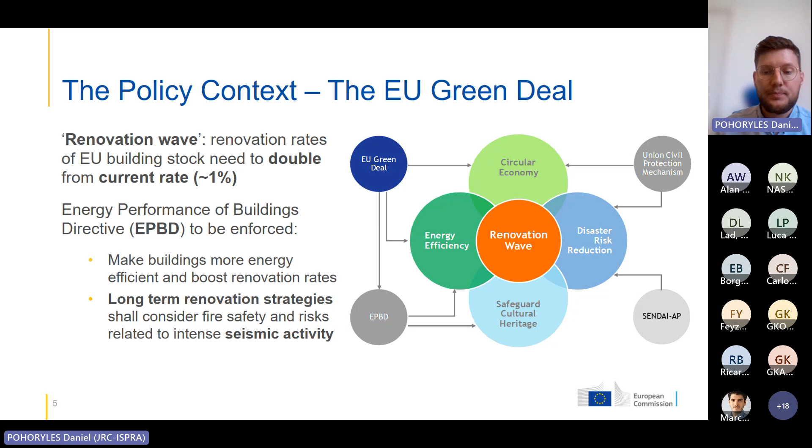At the JRC specifically, there are a few projects that deal with the topic of integrated retrofitting of buildings. A major one was the pilot project on integrated retrofitting, funded by the European Parliament, which looked at integrated retrofitting from a very broad perspective - from technologies that can be used, to methodologies for assessing, to impact assessment. Most of the work we present today actually stems from this project. At the end of our presentations you will also see some recent reports - we've just published a series of reports on this topic at the end of last year, so if you're interested you might find a lot more information there.

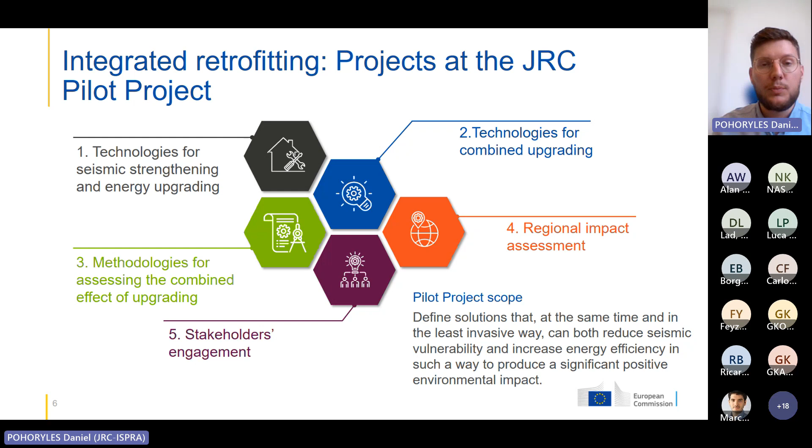Another example of a project at the JRC that I've contributed to is the iRESIST+ project, which deals more with an experimental assessment of specific technologies. I will talk a bit more about this later. This project defines technologies for seismic plus energy retrofitting schemes for existing buildings, and was carried out at the European Laboratory for Structural Assessment, which is our lab here at the JRC in Ispra.

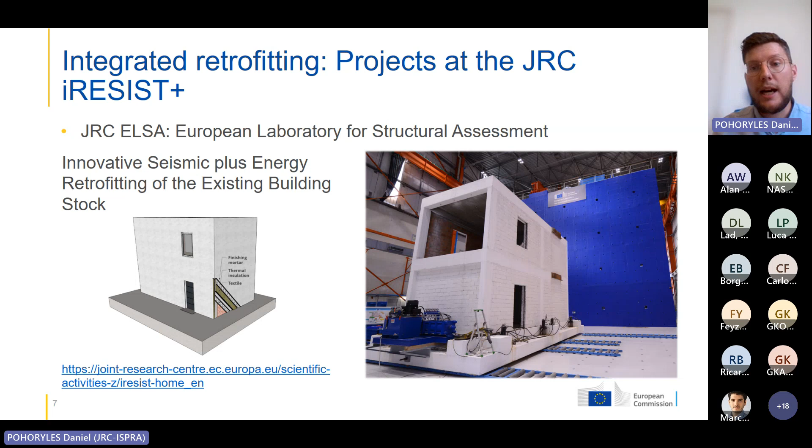So to come now to the why - why do we care about this topic, and why is building renovation such an important topic? As you will all know, in Europe especially, our cities and buildings have quite an old age and are aging as well. Data from Eurostat suggests that 80% of the EU building stock was actually built over 30 years ago, and more than half is more than 50 years old. This means that many of these buildings have been built before modern energy and seismic or structural standards have been put into place.

This explains also why 75% of the EU building stock is considered energy inefficient, which in turn leads to a major share of CO2 emissions and energy consumption in the EU being related to the building sector. Here you can see some figures: 40% of the EU energy consumption is related to buildings. At the same time, particularly in Mediterranean or Southern European regions, which participants of these meetings will be very well aware of, there's a seismic risk, and over 170 million Europeans are actually exposed to earthquake hazards.

And if this is combined with an aging building stock, with degrading materials, or with buildings not built to current standards, there's obviously a very high risk for devastating consequences, as you can see here with failures of buildings or heavy damage to buildings.

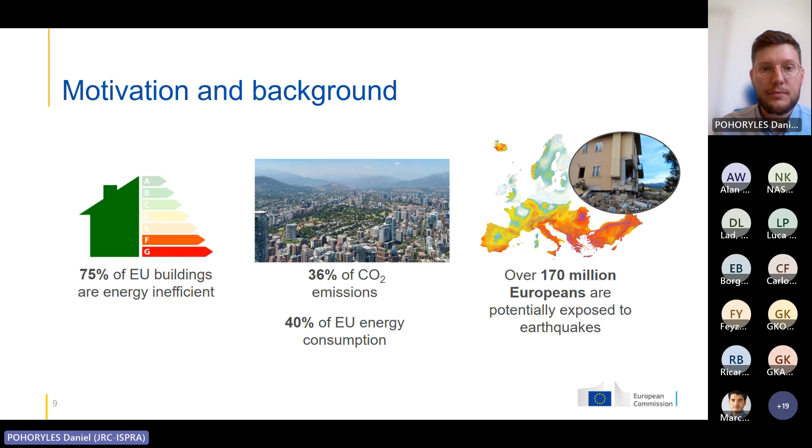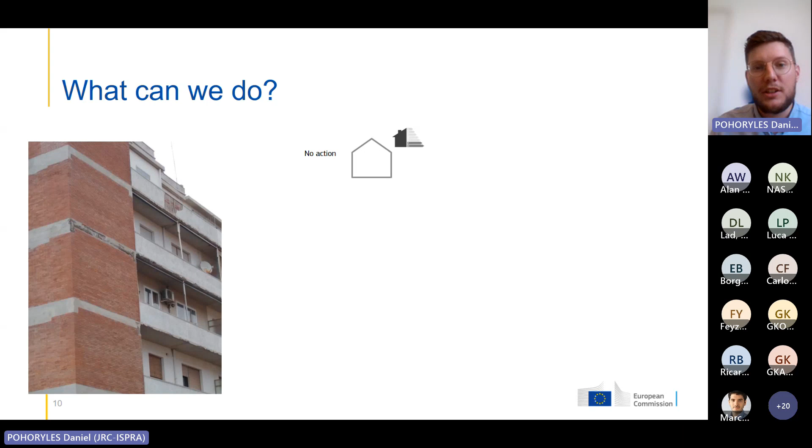So what can we do if we have our building stock that is aging and materials are degrading? We could do nothing, take no action, which may seem the cheapest option at the beginning. But when we consider that the buildings are energy inefficient, combined with high energy costs and the cost to our environment, as well as the risk of earthquakes, if the buildings are structurally deficient there's a risk of damage or collapse. This cannot be an option.

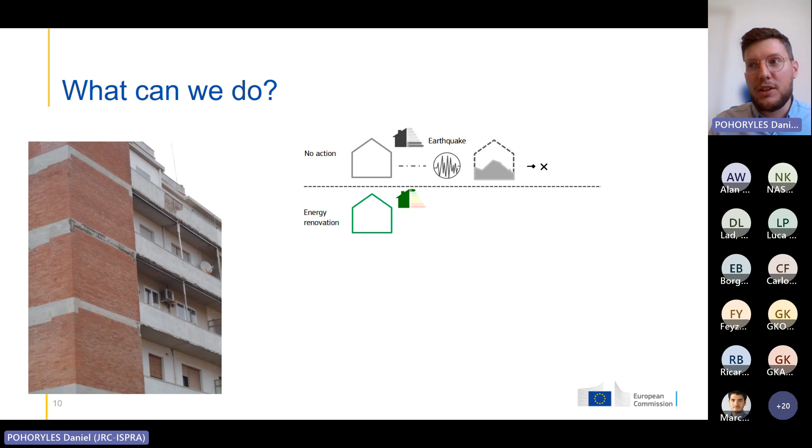Recently, a lot of energy renovations have been carried out across the EU, and this is obviously something very good for the energy efficiency of buildings. But if we're in regions that are earthquake prone, and we don't assess the structural capacity or seismic resistance of these structures, there's the risk that if an earthquake comes and no intervention has been done, the building will still collapse or the damage will still occur. And then we have a building that has a higher value because of the energy renovation investment, so the losses are even higher.

So if we want to improve the structural and energy performance of the building stock, an option would be to demolish the old, insufficiently well-designed building and construct new ones according to modern standards. Buildings would be very highly energy efficient, while ideally also resisting the earthquake loading on the site. This may sound like a good solution, however, think about the scale of the problem.

The large amount of buildings that actually need retrofitting or renovation means this will not be economically viable. It will not be sustainable from a life cycle perspective, and it will change the appearance of our cities so drastically that this just cannot be an option. And finally, if you have cultural heritage buildings, you may not even be able to do this because these buildings are protected. So another solution, the one we're investigating here, is integrated seismic and energy retrofitting.

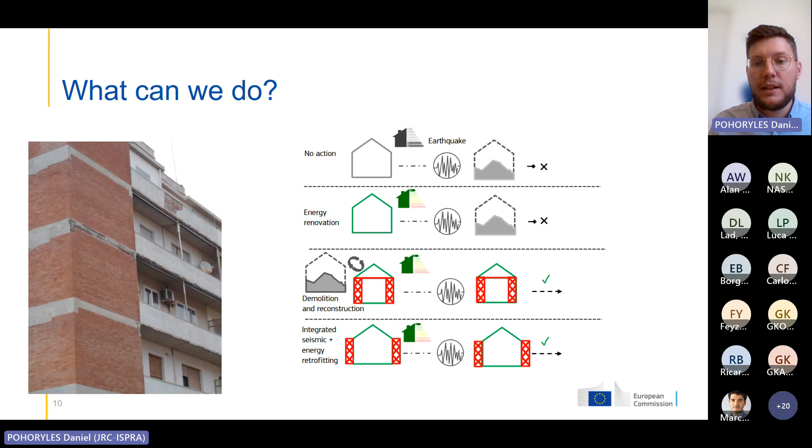By applying energy retrofitting, the energy efficiency can be improved, and at the same time, by also improving the structural resistance through seismic retrofitting, the building can withstand earthquake loads. This allows us to make our building stock sustainable, while at the same time making it more resilient to the risk of natural disasters such as earthquakes.

This brings a lot of advantages: reducing economic and human losses from seismic events, but also reducing the impact of reconstruction or repairs needed after seismic events, which also have environmental impacts. It reduces labor time for renovations, as the two retrofitting schemes can be applied at the same time.

And obviously the energy efficiency part will reduce the need for heating or cooling the buildings if done adequately, while at the same time improving the resilience of our building stock through the structural aspect of the retrofitting scheme. Finally, integrating the two together also provides further cost effectiveness, which might further incentivize people to renovate or retrofit their buildings.

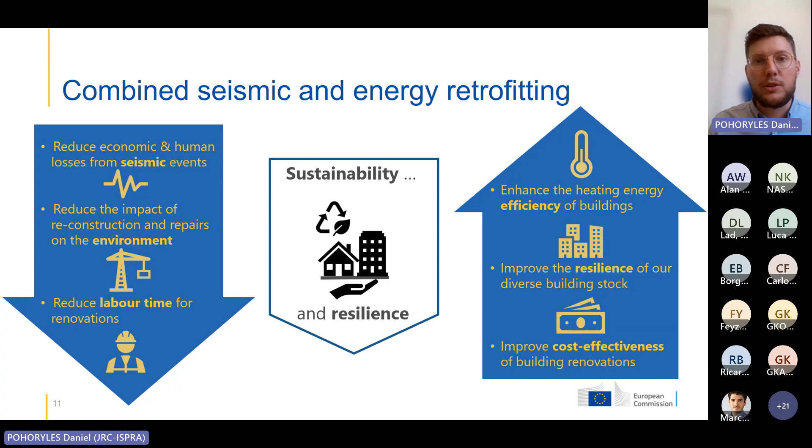So now, having explained what the need is, I will go through some examples from the scientific literature of technologies that have been proposed for combined or integrated retrofitting. This topic has actually emerged in the last maybe 5 years, and it's really an emerging topic in the scientific literature, with a lot of publications coming out especially in the last couple of years.

Within the framework of this pilot project that I described before, we've carried out a literature review on combined and integrated retrofitting techniques, where we identified different types of technologies proposed for integrated retrofitting. We found that the technologies proposed range a lot in terms of the level of maturity. Some works are just pure concepts and proposals, while others have already been validated experimentally or even applied to case study buildings.

When we talk about retrofitting or renovation of buildings, it's always important to consider that any comparisons being made always depend a lot on the building needs. Retrofitting is never a unique solution; there might be many different possible retrofitting solutions for the same buildings, or some solutions that are more adequate for certain kinds of buildings with certain deficiencies or certain materials, or it depends on the status of the building.

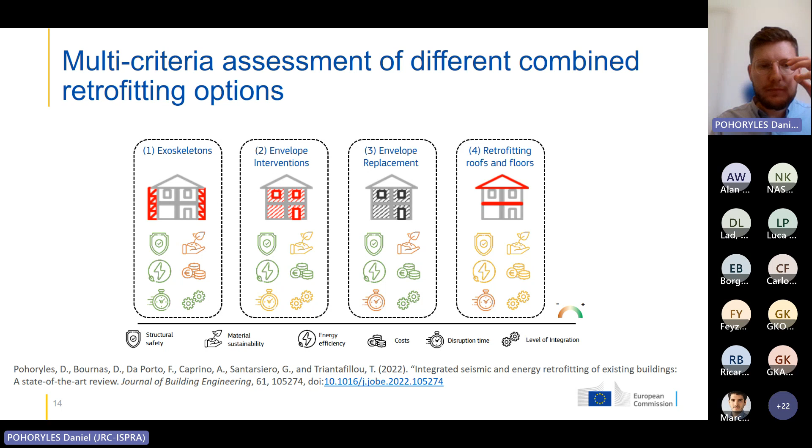To start with, integrated exoskeleton solutions are based on the application of a structural exoskeleton, an external self-supporting system which needs its own foundations that can be connected to an existing building, most likely a vulnerable RC building or a steel building, that currently has low dissipative capacity, and for which the exoskeleton can provide additional strength and stiffness. It's typically not applicable to masonry buildings, however.

Some examples of these include external bracing, RC shear walls, maybe additional RC frames that can be applied, or bracing shell exoskeletons.

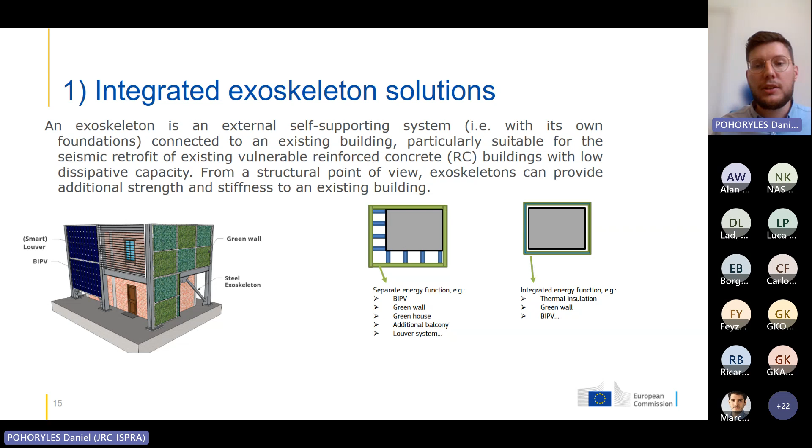Or it can be fully integrated in the sense that if you have a shell exoskeleton, you can also add the thermal insulation or the green wall as part of the shell.

I will give you some non-exhaustive examples of proposals for integrated exoskeletons. One that has been applied already to case study buildings in Japan are integrated facades, a very simple system where on top of buckling restrained braces, a louver system can be mounted. Like this, heating of a building can be reduced from the solar heat gains, and the cooling needs are reduced. This is a very simple system, but is already an early example of integrated exoskeleton solutions.

On the other hand, more advanced solutions would be the two steel-based solutions you can see on the right. Either steel-braced shear wall exoskeletons as proposed by Bellini, onto which all sorts of shading systems, green walls can be mounted, or diagrid exoskeletons, which form a shell around the building and onto which multiple different things can be mounted, providing an architectural upgrade to the building, but can also be considered an energy upgrade by applying photovoltaics or green walls.

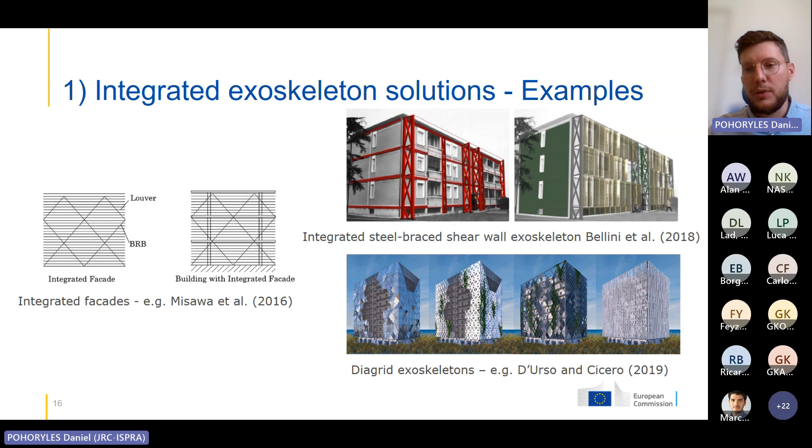The benefits of integrated exoskeleton solutions is that the business downtime can typically be quite low, as residents don't necessarily need to be relocated. As shown before, the exoskeleton can provide an architectural upgrade to the building, but it can also provide more living space, such as the addition of new stories or the addition of terraces or balconies.

A very big advantage is that such solutions are typically reversible, demountable, and repairable, so they're also easy to maintain. However, it comes with some less desirable aspects: these solutions are highly invasive, and they also change the appearance quite a lot of the building, which in some cases can be beneficial, but in other cases, for example heritage buildings, this might not be suitable.

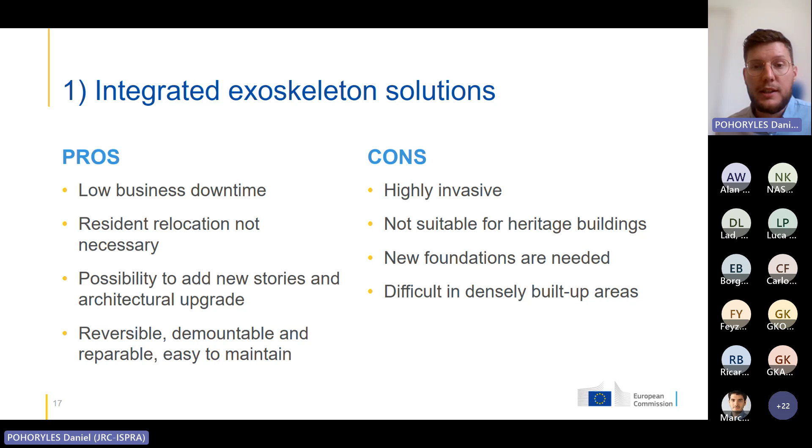On the other hand, the need for new foundations may mean that particularly in densely built areas, such as cities, there might not be the space to actually carry out these kinds of interventions.

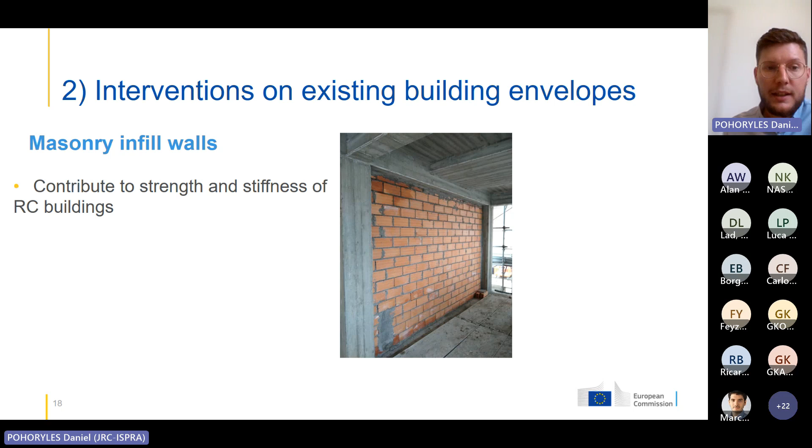A second type of intervention is on the existing building envelope. This is particularly the case for external walls or masonry infill walls in RC buildings or steel buildings, where these existing envelopes contribute to the strength and stiffness of the buildings but are typically not included in the design. So they can also be the source of severe damage, not just to the infills, but also to the load-carrying elements framing them.

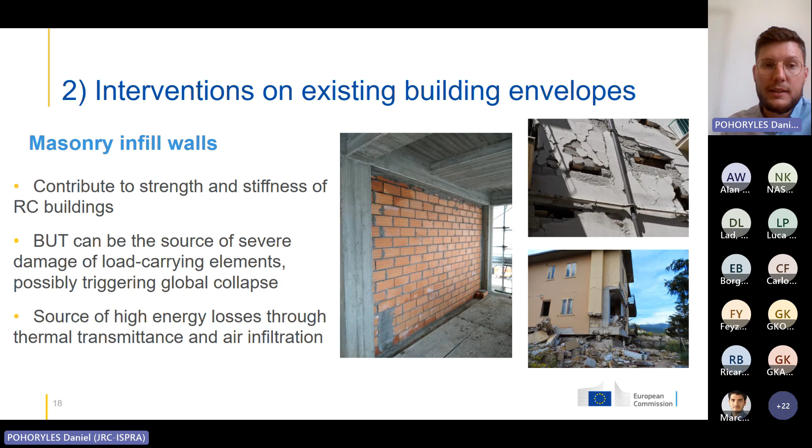Some solutions proposed for strengthening and improving the thermal insulation of external walls include the application of composite materials such as textile reinforced mortars combined with thermal insulation, the use of prefabricated panels, which can be either CLT panels or timber-based panels, or precast mortar panels that integrate the structural and energy perspective.

I will give a bit more detail on some of these at the end when I talk about the experimental work. Another solution that can be combined with any of these is the replacement of windows, which often also cause a lot of thermal heat losses in a building, combined with structural steel frames around the windows, which can improve stiffness, particularly for masonry buildings.

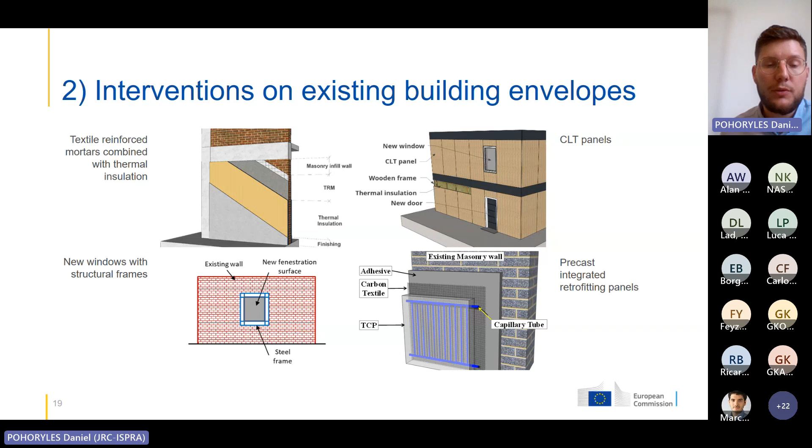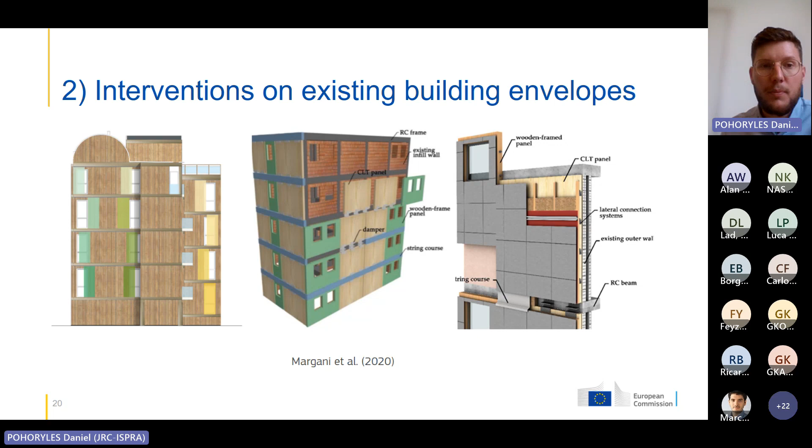Some examples of CLT panel applications are shown here, and they show that such a retrofit scheme, particularly for infilled reinforced concrete buildings, can provide an aesthetic or architectural upgrade as well as a seismic and energy upgrade. So when we look at the pros of this type of application, it's really applicable to any kind of building and can be tuned.

Depending on the specific technology you use, you can apply it to RC buildings, masonry buildings, and even steel buildings. Again, depending on the type of application, the invasiveness is much lower than in the case of the exoskeleton application. The need for resident relocation is not always there. So if the intervention can be entirely carried out from the outside, this is a big if, but if it can, then the business downtime can also be kept low.

And finally, if prefabricated or modular elements, such as prefabricated mortar panels or CLT panels, are used, then the application can be relatively fast.

On the flip side, I showed you some examples where architectural upgrading might be desired, but if we look at cultural heritage buildings, depending on the type of application, the change of the building facade cannot always be accepted. Any of these interventions on the existing envelope will typically modify the facade as well.

On the other hand, by strengthening the infill walls, you will also have higher shear forces acting on the frame members, but also on the foundations. So you always need to evaluate the existing frame and existing foundations of the building, which may also need to be retrofitted afterwards. This can obviously increase the costs and duration of these interventions.

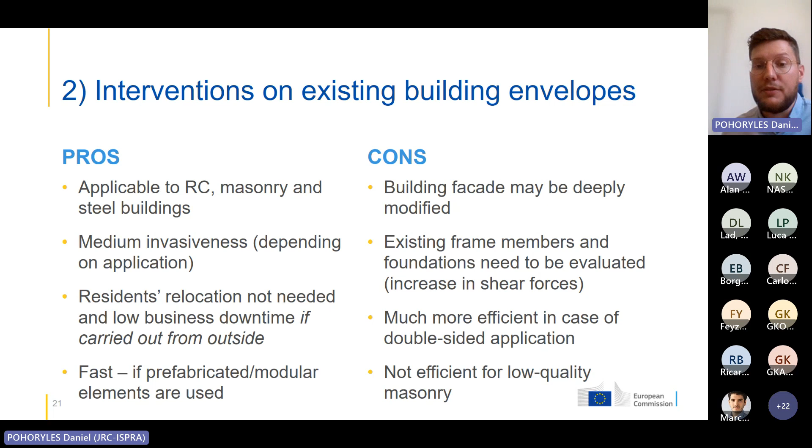So in cases where strengthening interventions are not feasible in practice or not economically viable, maybe because the substrate is too poor quality or has been damaged already, then the replacement of the envelopes could become economically viable, even though it is obviously a much more invasive type of intervention. Here we find two different types of interventions: those that propose new infills with better thermal transmittance values, but also stronger and stiffer than the existing masonry infills.

And like this, they can increase the stiffness and strength of the building, but also improve the thermal efficiency of the building. Other solutions try to, instead of strengthening and stiffening the building, just increase the deformability of the frame, reducing the interaction between the infill and the frame. Some examples include sliding or deformable joints or gaps between the infill and the frame.

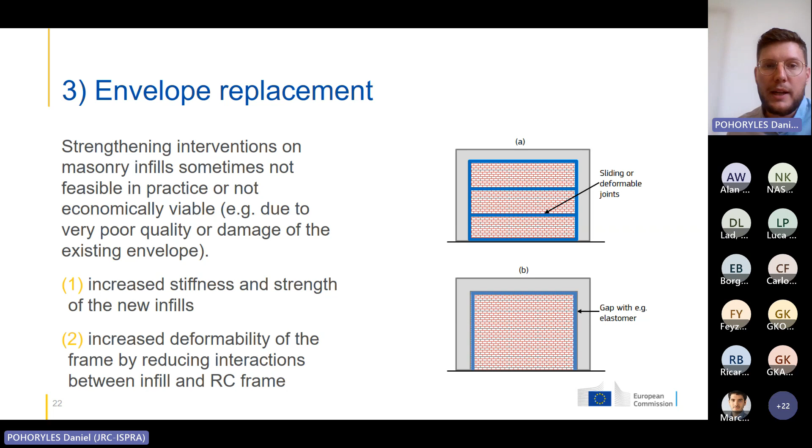Here, the use of thermal insulation, as was the case for the envelope strengthening and improvement, can also be applied, but also bricks with better thermal capacity can be used, or bricks that are themselves filled with some thermal insulation material. So when you replace the envelope, you can really achieve any kind of energy efficiency that you would like to achieve.

These kind of replacement strategies are obviously only applicable to infilled RC and steel buildings, but not to load-bearing masonry buildings where the walls are actually irreplaceable, let's say.

High improvements in energy and seismic performance can be achieved because you can really build whatever new external walls you want. Typically the cost of the materials is relatively low, but the intervention, with the whole demolition and the substantial amount of waste that is being generated, and the need for relocating the residents, also means that the cost of the actual intervention might be higher than the previously described ones.

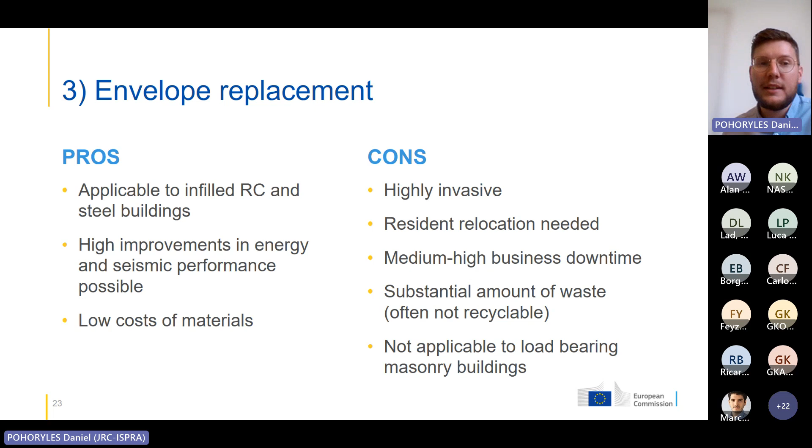Finally, there are also interventions that are carried out just on the roofs or the floors, on the horizontal diaphragms of the buildings. This would typically be combined with any kind of envelope interventions that we have shown before. So combining an intervention on the walls, but also on the roofs and floors.

Here some examples are shown where the existing roofs can be strengthened or stiffened with steel or FRP, for example, and at the same time, thermal insulation and ventilation can be applied in the new roof structure.

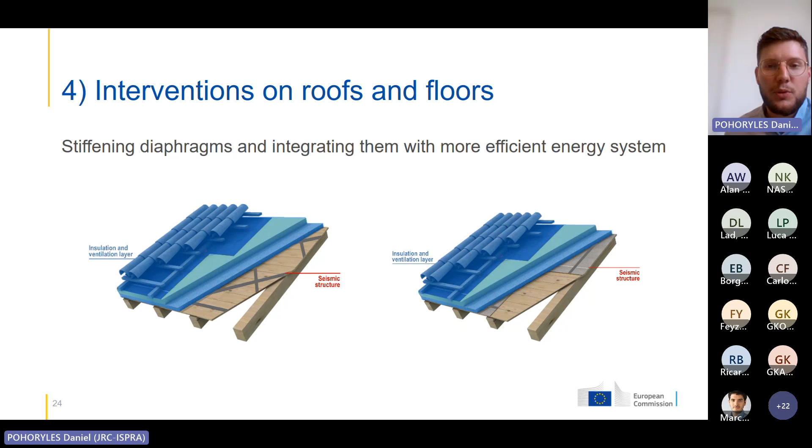In masonry structures in particular, having a better horizontal diaphragm can improve the seismic behavior substantially. Another advantage, of course, is that it can be combined with the other interventions that we mentioned before.

The negative aspect is that these interventions are highly invasive, so you always need to relocate the people, especially if you build new floors. People cannot live in the house, so at least for 1 or 2 floors at the same time, the residents need to be relocated completely. So ideally, it's combined with another intervention that is already quite invasive as well.

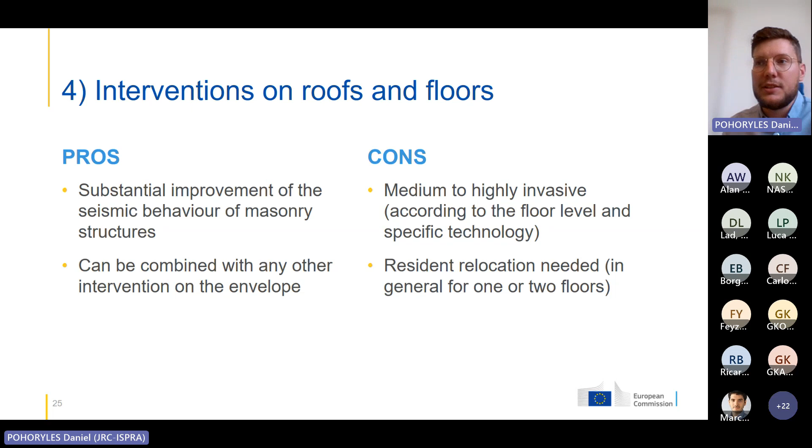I will not go into details of this because I'm running out a bit of time, but we have done an analysis of these different technologies, and in our recently published technical report, you can find more information on how we evaluated the improvements in structural and energy efficiency, but also the costs, the impact on the environment, the invasiveness and the level of disruption, as well as the level of integration.

So are these truly integrated retrofitting schemes, or are they more coupled? That is, using one structural and one energy efficiency system and combining them.

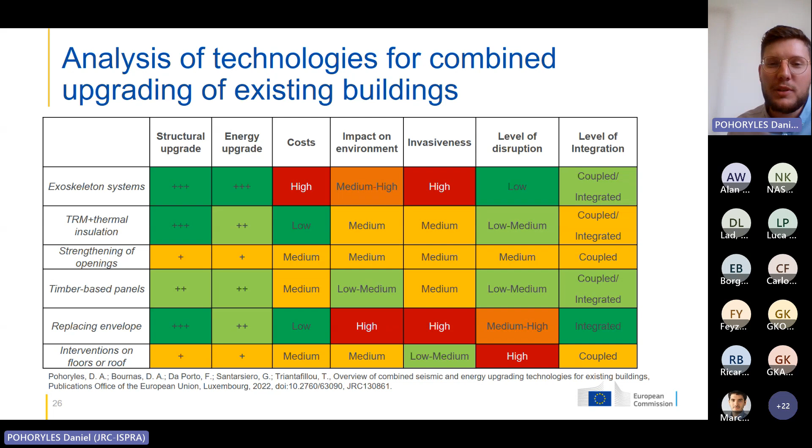I will now briefly go through some examples of experimental testing on integrated retrofitting solutions where the JRC has participated. One part is from the iResist Plus project, where a combination of textile reinforced mortar, or TRM, is combined with the application of thermal insulation. The other one is the SEP Plus project, a collaborative project between KOCED in Korea and the JRC in ISPRA, where precast panels are created that at the same time improve the strength of the existing building and improve the energy efficiency by using capillary tube systems.

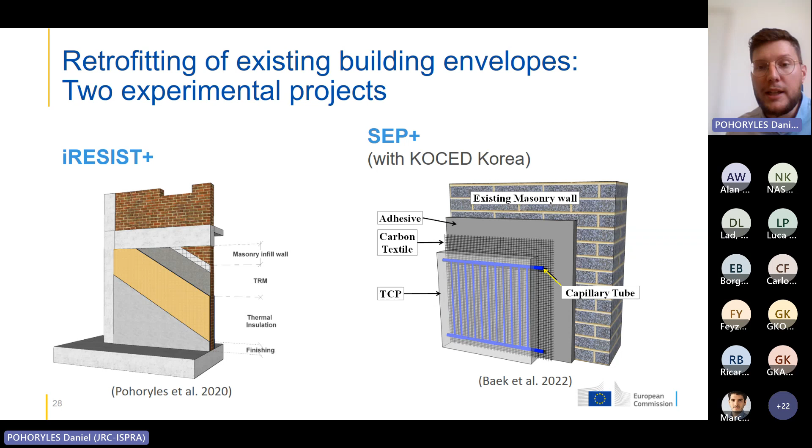So first, talking about the iResist Plus combined retrofit scheme. This is basically a combination of these textile reinforced mortars and thermal insulation. By applying both at the same time, you can achieve higher safety of the building, but also higher energy efficiency, and drive down labor time and costs, because you can really apply both at the same time of application.

Currently, this system is being experimentally validated on a typical pre-1970, non-seismically designed infilled RC building. It's being tested under pseudodynamic loading as a 5-story structure. Here you can only see the 2-story physical structure, but there are also 3 further structures that are numerically modeled. This is being carried out at our lab at the JRC in ISPRA.

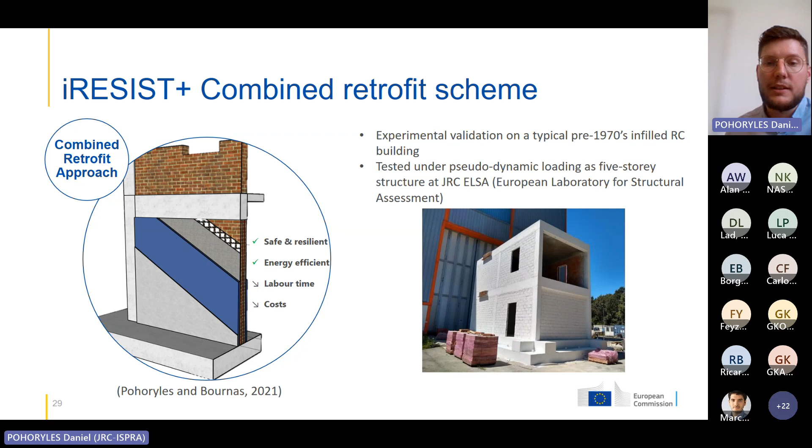What is very interesting is that the testing, for the first time, is a combined seismic and energy testing, where, for instance, for the control building, we start with a blower door test in order to understand if there are any air infiltrations due to cracks or due to poor quality of the masonry infills.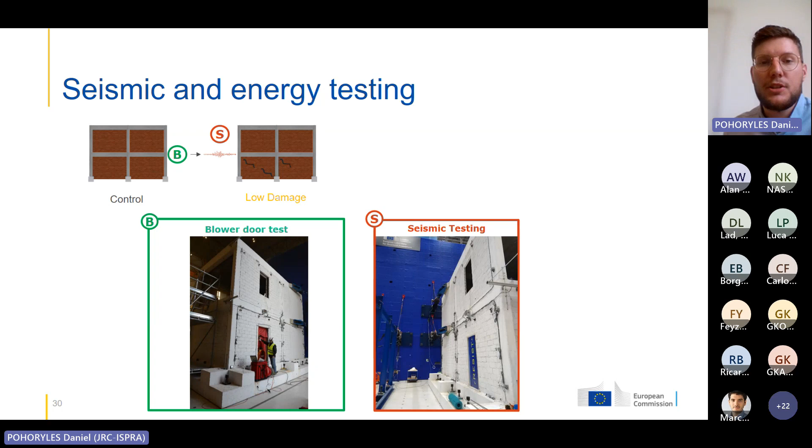And then we test the building to increasing levels of seismic damage and reevaluate the thermal capacity of the building due to air infiltrations at each step of the seismic damage. Results of this will soon be published.

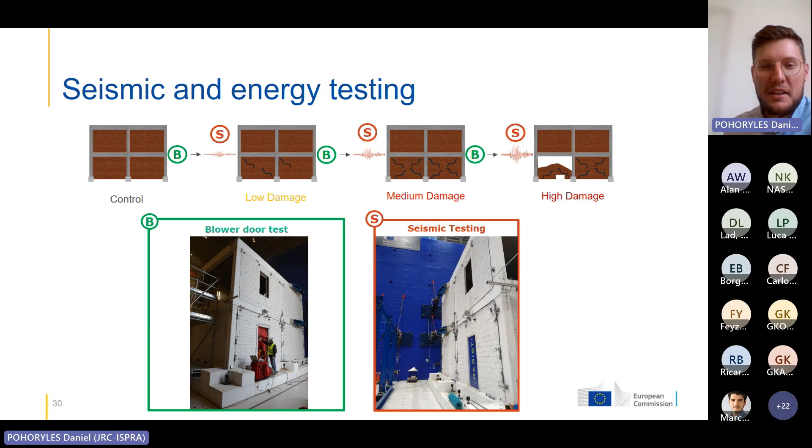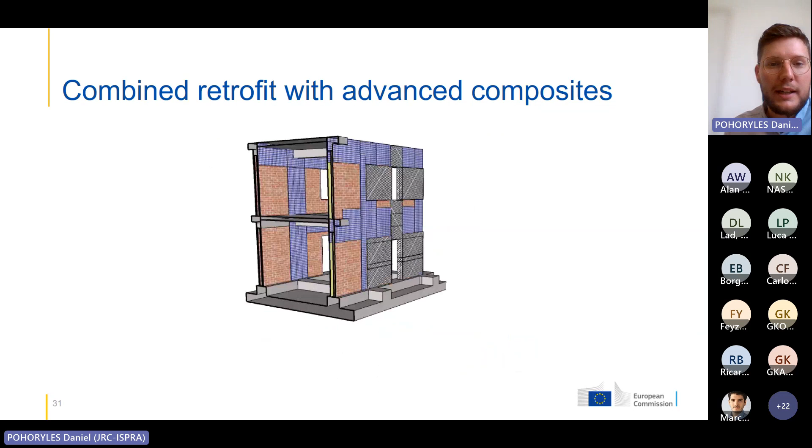Next steps are now, which is currently carrying out the retrofitting of the building. As I said, the textile reinforced mortar, shown in blue, is combined with these yellow thermal insulation panels. Then another layer of textile reinforced mortar can be applied on top, and like this, next to the structural upgrading due to the thermal textile reinforced mortar, also an energy upgrading of the building can be achieved.

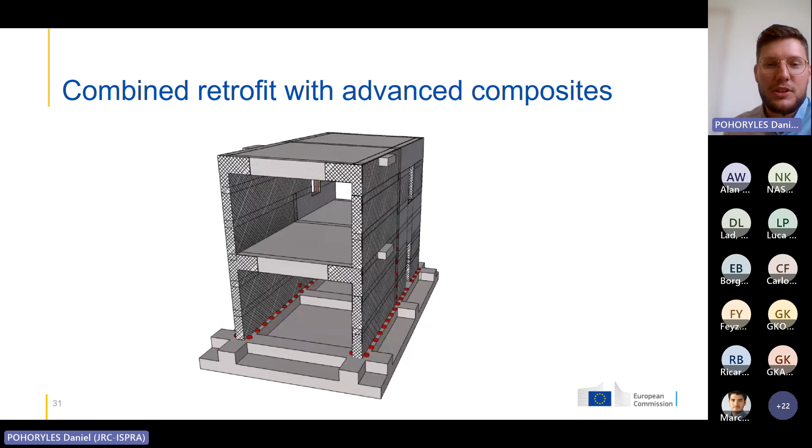The other system I would like to talk about is this textile capillary tube system, which is also basically using a similar system to TRM, embedding carbon textiles into an adhesive, into a mortar, but as a precast panel. At the same time, capillary tubes are being embedded into these boards. The capillary tubes have water running through them, which can be cold or hot water, in order to generate heat or cooling onto the existing wall. Like this, the thermal efficiency of the building can be improved, while at the same time the strength can be improved.

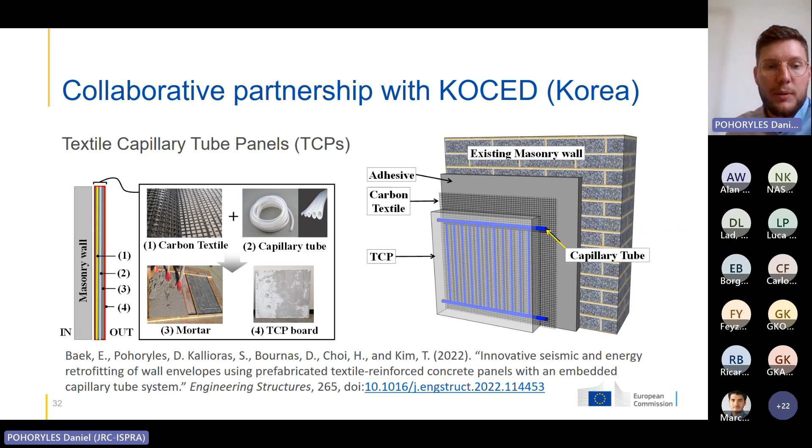So let's say these two systems could be used interchangeably depending on the actual need of the project. The advantage of the TCP panels, being precast, might be the fast and easier application, while the TRM application is a bit more flexible. You don't need to know the dimensions already; you can apply it, let's say, on site according to the dimensions needed. But in both cases, very substantial improvements in the structural capacity of the frame can be achieved, while at the same time the energy efficiency of the building can also be substantially improved.

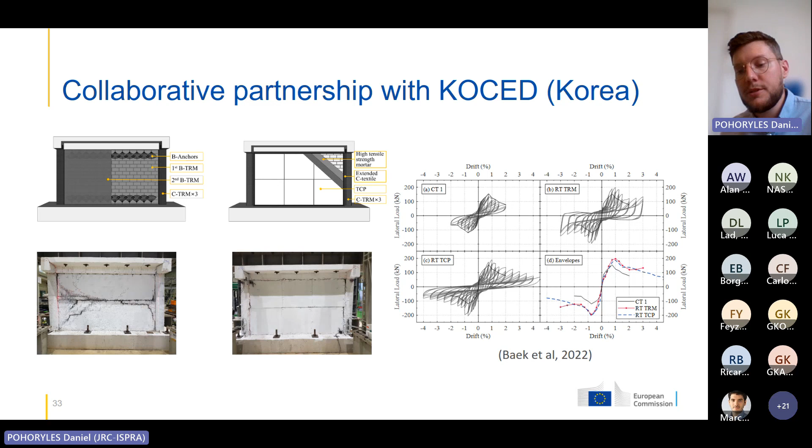So to quickly conclude now, my part of the presentation: as I've shown you, there's really a need for seismic and energy retrofitting in many parts of the EU, and this affects a large part of the EU building stock due to its old age. We've identified four main types of integrated or combined retrofitting solutions, which range from exoskeletons to interventions on the existing envelope, the replacement of the existing envelope, but also interventions on the horizontal diaphragm elements of buildings.

While many of these technologies are still in a very conceptual stage, there's definitely a need to validate experimentally and apply to case study buildings many of these more. Some of these approaches are currently being evaluated experimentally with participation of the JRC.

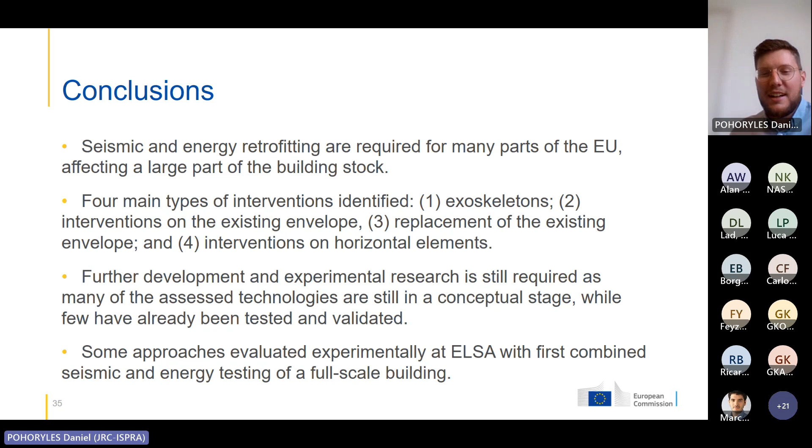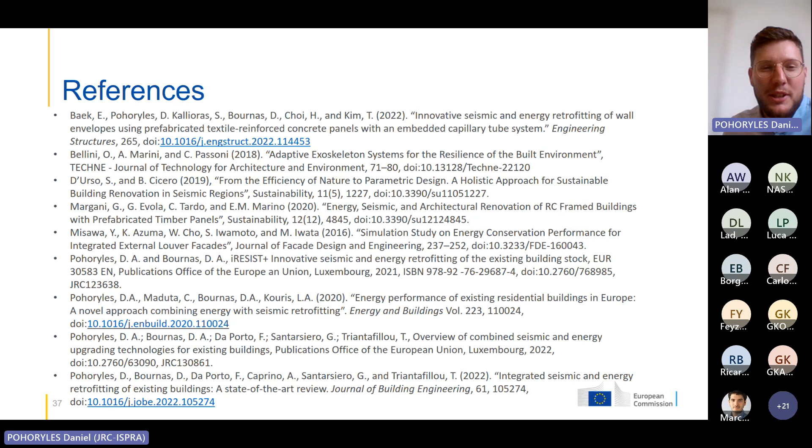I will now go to quickly present you some of the recent publications from our group at the JRC, and would like to use this as well as an opportunity to thank my co-authors with whom I have worked on this topic for many years. The two yellow technical reports are related to the pilot project. Then there's a technical report on the iRESIST+ project, as well as some scientific publications. If you are interested in finding out more about these activities, please have a look at our publications. And maybe later for the recording it can also be useful for people interested to look at the references that I've been talking about today.

But with this, I would like to thank you and pass the floor back to Marco and then to Kostas as well, to deliver the second part of our presentation.

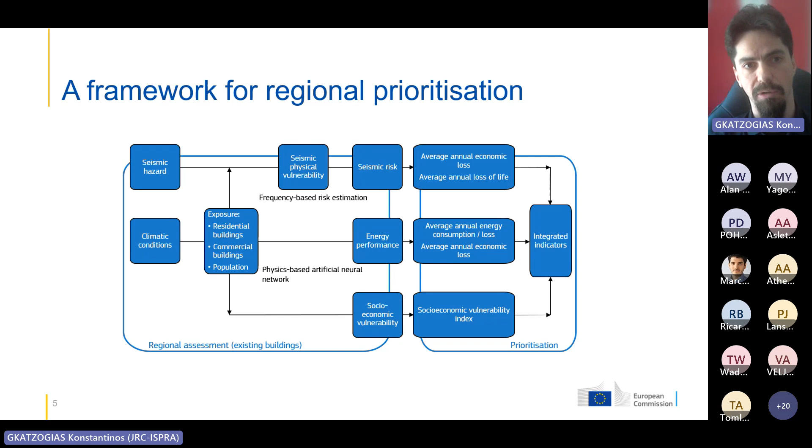We adopt the European Seismic Hazard Model 2020 for the case of seismic hazard, and we adopt the HDD, the heating degree days, which is a parameter that relies on measurements of outside air temperature. The HDD is practically used to estimate space heating energy requirements in buildings. What you see on the map is practically an average HDD over a decade of data that come from Eurostat.

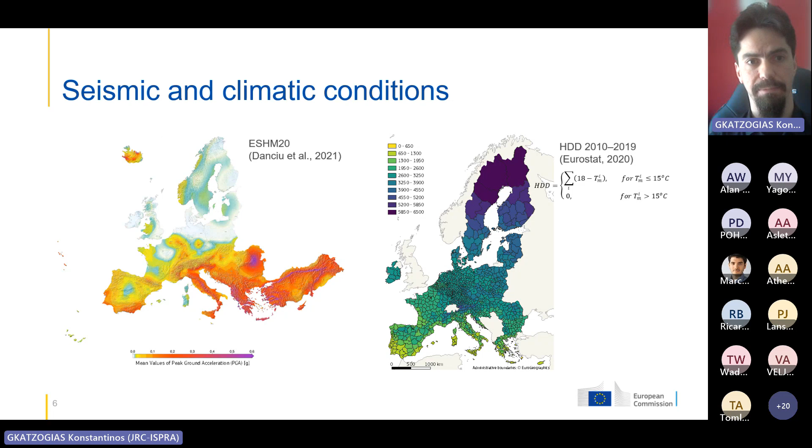As a reference point, we use the exposure model of the European Seismic Risk Model 2020. However, we extended this to include also energy attributes of the buildings. Practically, we assigned thermal transmittance values in each country, in the buildings of that country, as a function of the construction date. So what we practically did is to subdivide each building class of the European seismic risk model into additional building classes so that we can assign unique thermal transmittance values.

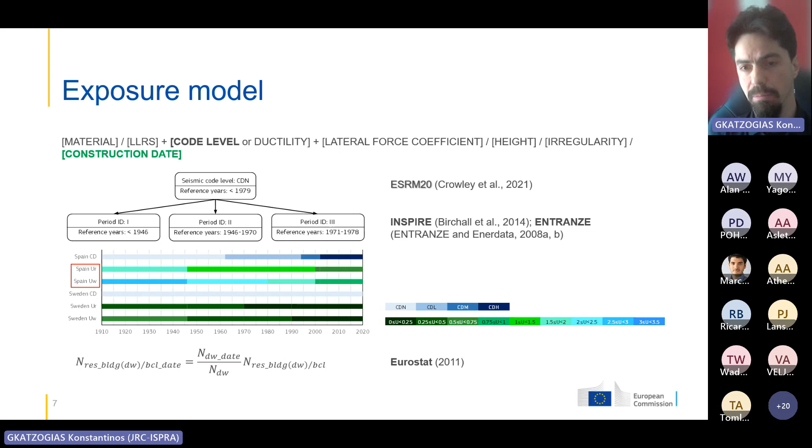The exposure subsequently in terms of population and buildings was distributed from the classes of the European seismic risk model to the extended classes by using some ratios of dwellings per construction date to total dwellings per region, again obtained from Eurostat.

Here you can see two snapshots of attributes of the extended exposure model. On the left, you see percentage of buildings built with no seismic design consideration and with low seismic design considerations. On the right part, you see buildings built with a thermal transmittance value higher than 1.6. This value actually refers to buildings from different eras across Europe because different values were enforced across Europe during different times. So this value corresponds, for example, to buildings from the 80s in Greece, from the 60s or 70s in France, and even from the 40s in northern countries that traditionally enforced stricter requirements because of the climatic conditions.

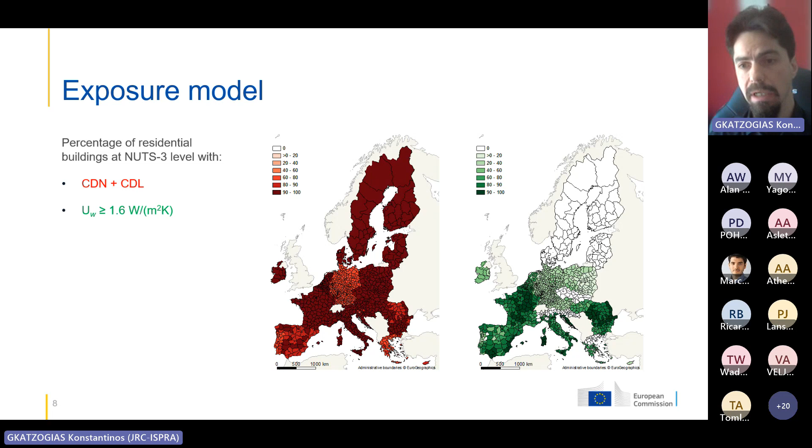These two maps also give us a qualitative indication of the vulnerability of buildings. But of course, we have to integrate this with environmental conditions, seismic hazard and climatic conditions, and the exposure in order to calculate risk and energy performance of buildings. So seismic risk comes from the European Seismic Risk Model 2020. Here, in our case, it is mapped, of course, in the extended building classes that I have described before.

And it is also mapped to NUTS 2021 classification system. NUTS is a georeference system which describes the administrative divisions in the countries of the EU. So from seismic risk, we estimate average annual economic loss due to seismic repair, direct loss, and average annual loss

of life. In the case of energy performance, we employed an artificial neural network to reduce complexity because of the many different typologies of buildings across Europe, and the resolution of the climatic conditions shown before. This model uses key energy attributes of the building classes as input: the height of the buildings and thermal transmittance values for external walls and roofs, along with the climatic conditions, to calculate average annual energy consumption, which can be translated to average annual economic loss due to space heating energy consumption using energy prices adjusted to the year 2020.

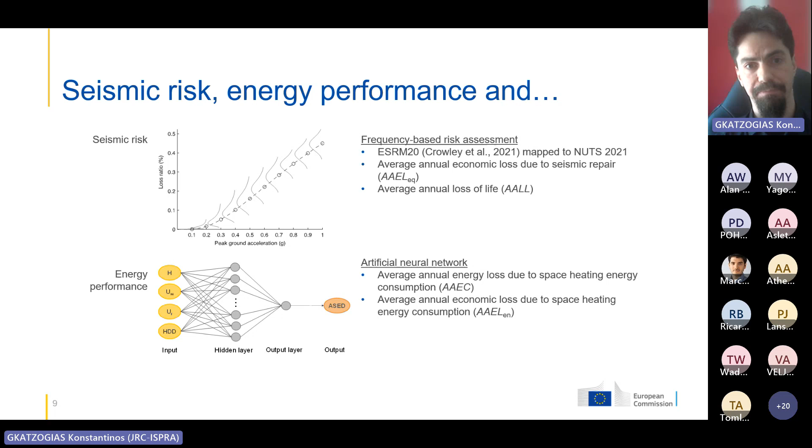In the case of socioeconomic vulnerability, we employed composite indicators. A composite indicator is an approach useful to describe a concept or idea that is not very easy to quantify or measure by using measurable sub-indicators.

Here we used the EU Human Development Index, the EU 2020 Index, and the EU Social Progress Index to measure socioeconomic development, inclusive growth, and social progress, respectively. These metrics measure well-being, so we adapted and combined them into a single measure to quantify socioeconomic vulnerability.

In the plots, you see this index, the SVI, plotted from the highest to the lowest value across the EU, and also plotted against GDP per capita. Interestingly, as wealth increases, socioeconomic vulnerability reduces up to a point, so the relationship is not entirely linear there.

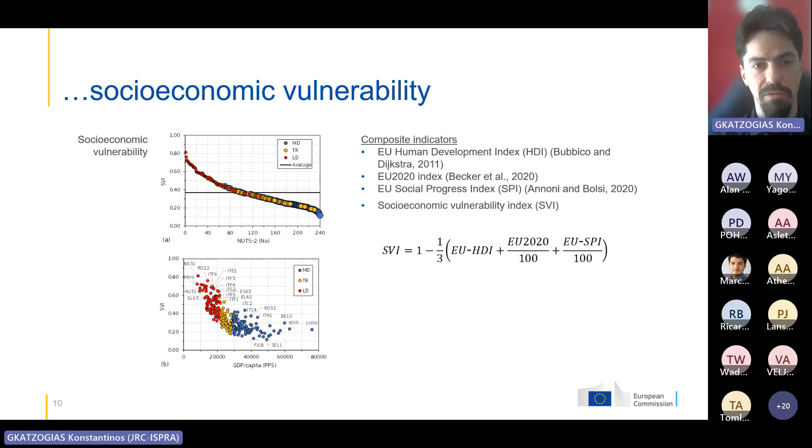From regional assessments, we evaluate the metrics described before, and we combine them, either in absolute or normalized form, to formulate integrated indicators. We formulate single-sector integrated indicators, meaning we address aspects only from a single sector. This could be, for example, loss of life and economic loss due to earthquake damage.

Alternatively, we formulate multi-sector integrated indicators that combine aspects from all three sectors: seismic, energy, and socioeconomic ones.

In integrated indicators, we normalize the sub-indicators and give them the same weight. This was a decision made mainly to reduce complexity, but also to filter out the severe disparities among different sectors.

For example, if one tries to add economic loss due to seismic repair with economic loss due to energy consumption and rank regions according to this number, the result will be very close to ranking regions only by energy performance. This is because the associated energy loss is typically much higher than the loss associated with seismic repair.

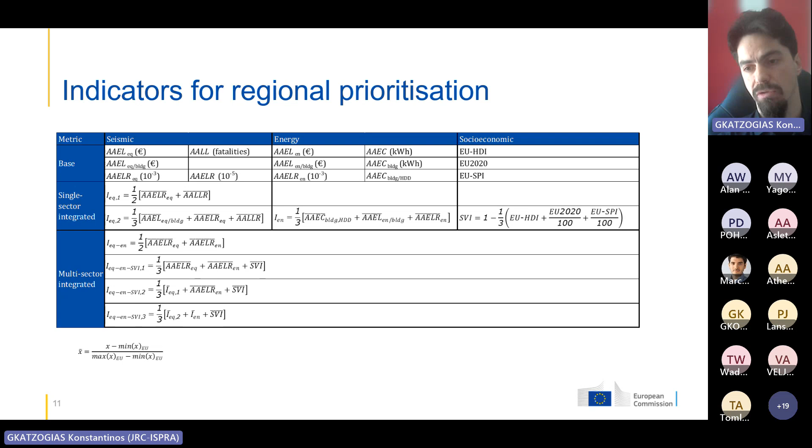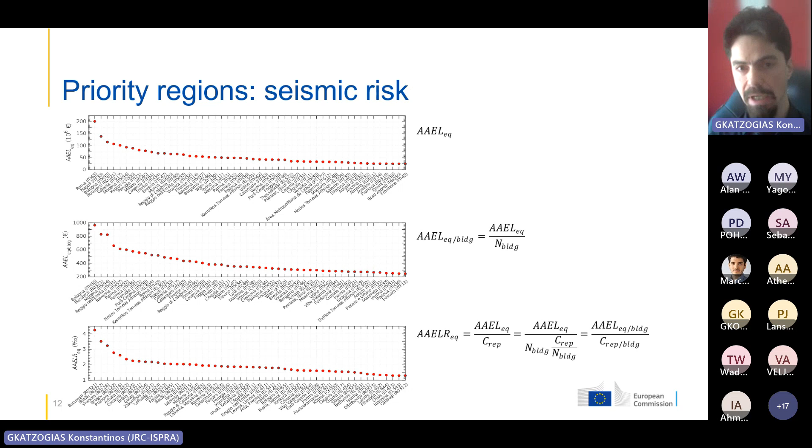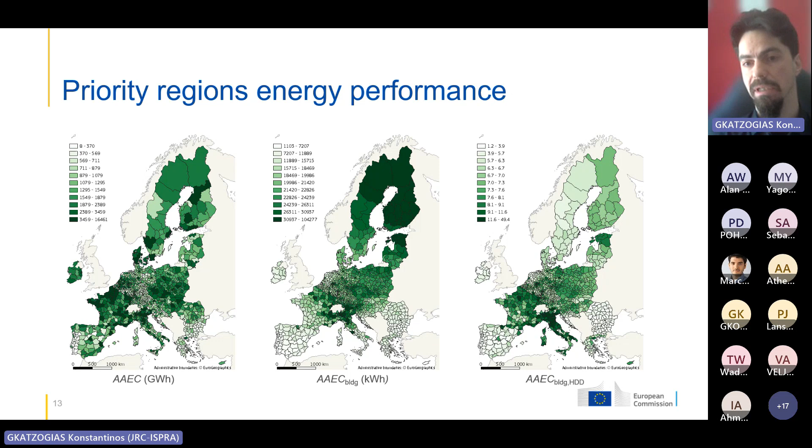If we normalize this with the climatic conditions to eliminate that effect, we end up with an indicator that practically prioritizes and highlights regions with building stocks that have inefficient building envelopes and high potential benefit from energy renovations.

In this last slide describing prioritization schemes, I wanted to show the differences between different sector prioritizations. On the left is priority based on seismic risk, which is the indicator of economic loss normalized to the value of the building stock. The same is shown for energy performance in green, and in blue is socioeconomic vulnerability.

In the last map on the right, we have an indicator that integrates all the previous trends I've described. In red are the top 100 regions, considering at the same time economic loss due to seismic repair, energy consumption, and socioeconomic vulnerability. These 100 regions integrate 10% of the energy consumption and cost, 60% of fatalities, and 50% of repair cost from the total losses across Europe.

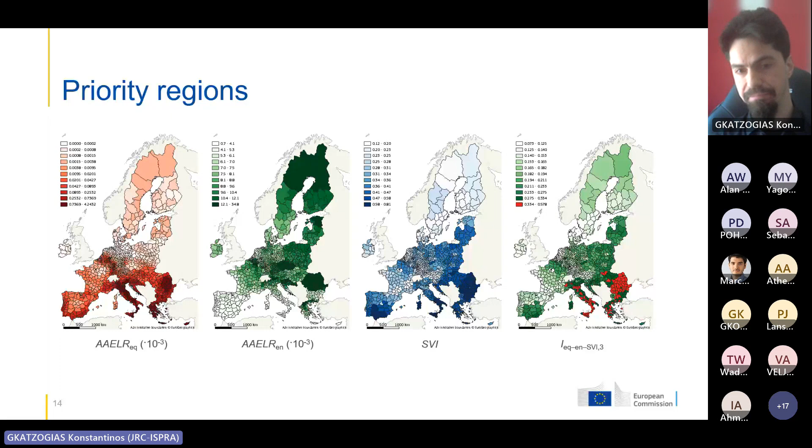Moving forward to extending this framework for impact assessment of renovation: with the two boxes on top now collapsed, you see the previous framework I described. From this, we get some priority regions where we want to implement renovation.

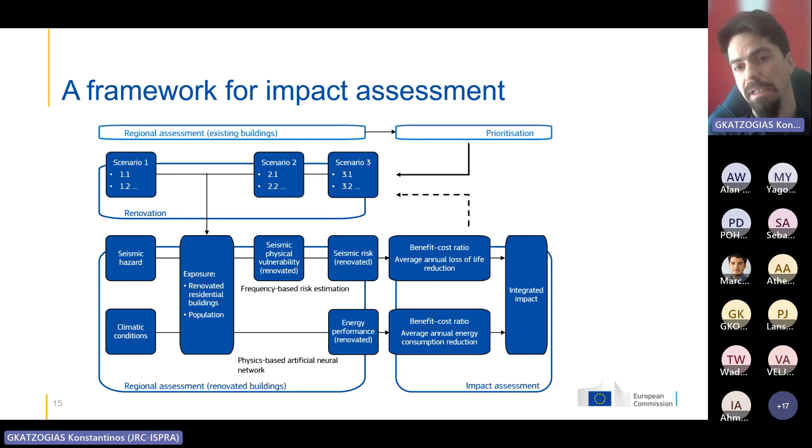Then we set up renovation scenarios and rerun our regional assessments, this time considering the renovated building stock and which buildings we're going to renovate, defined according to our renovation scenarios. Then we assess their impact using cost-benefit analysis and other impact metrics, which I'll describe shortly.

Here you can see some examples of renovation scenarios we investigated. Starting with the first one, a fairly simple one: scenario one promotes renovation of some macro taxonomy classes, predefined classes based mainly on engineering judgment.

For example, a scenario could be that we renovate all buildings with no seismic design considerations in a specific region. We use the same buildings to investigate the impact of applying seismic renovation, energy renovation separately, and then finally integrated renovation.

This approach is useful because it provides a risk-proofed investment in the case of integrated renovation, but at the same time it's not so rational when we apply only energy renovation, because we'd be renovating for energy performance buildings that have high seismic vulnerability and therefore high risk of losing our investment.

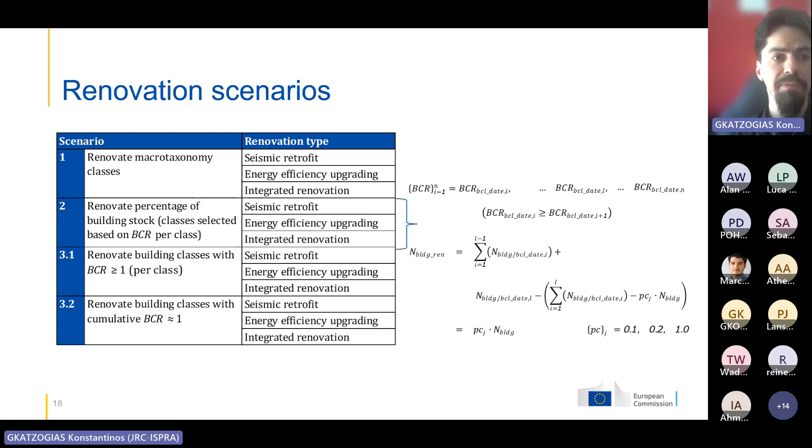The second approach - you can see the mathematical formulation, but I'll describe it simply. Scenario two promotes renovation of a predefined fraction of the building stock within a region, again based on engineering judgment. Here we investigated fractions of 10% and 20%, but also 100%, though this isn't realistic - it was done mainly for comparison purposes.

So how do we select our buildings? We rank the building classes within a region by BCR, their benefit-to-cost ratio, as if only that specific building class is renovated within the region. Then we add buildings to renovate until the specific fraction of 10% or 20% is reached.

Scenario 3 follows a somewhat inverse approach. In this case, we seek to find the type of buildings and the fraction of the building stock that can be renovated in a cost-beneficial way within a region, so that renovation of this fraction always results in a net economic benefit - meaning the difference between losses before and after renovation, also subtracting the cost of renovation.

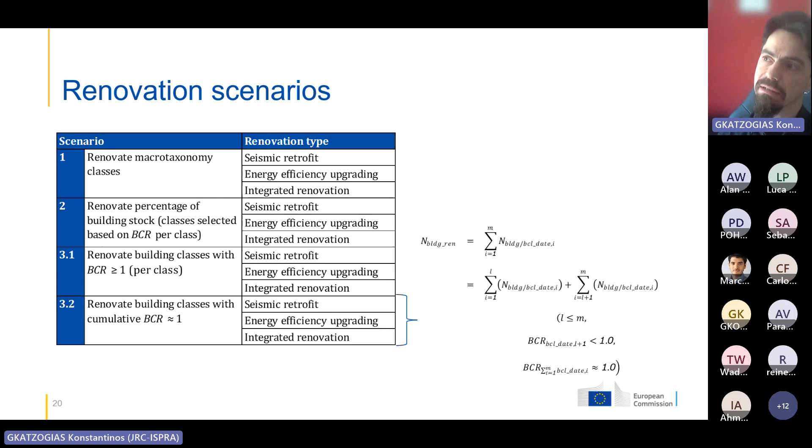And in this way, it is more suitable for the case that both the funds and the benefit are handled by a central funding entity. Here you can see how we estimated BCRs either for a specific building class or for a sum of building classes when we calculate this cumulatively. On the numerator, we have the difference between losses before and after renovation, and in the denominator, we have renovation cost. However, both terms are divided by the replacement cost.

We do this to implicitly consider the variation of renovation cost by country, by settlement type, whether this is a big city, urban, or rural area, and by material. So we consider renovation cost proportional to the replacement cost. Therefore, the denominator is always constant and calculated based on the reference case.

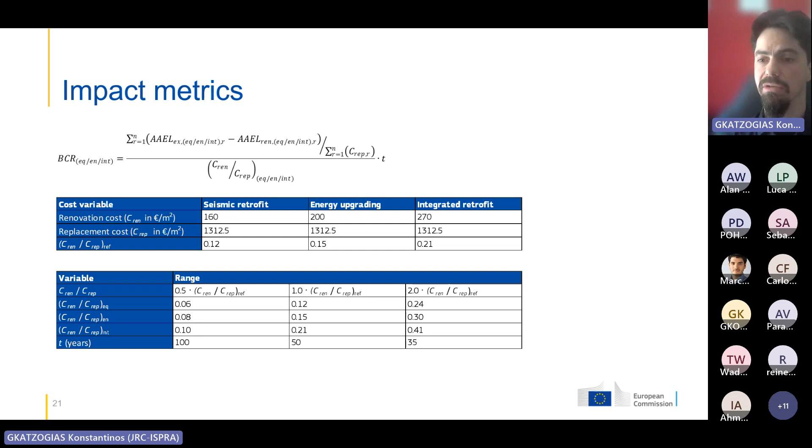Then the effect of renovation cost by country, settlement type, and material is introduced in the numerator by dividing by the replacement cost. We investigated the variability of these constant ratios of renovation to replacement cost, and also the variability in the planning period of our strategies, spanning from 35 years up to the extreme case of 100 years.

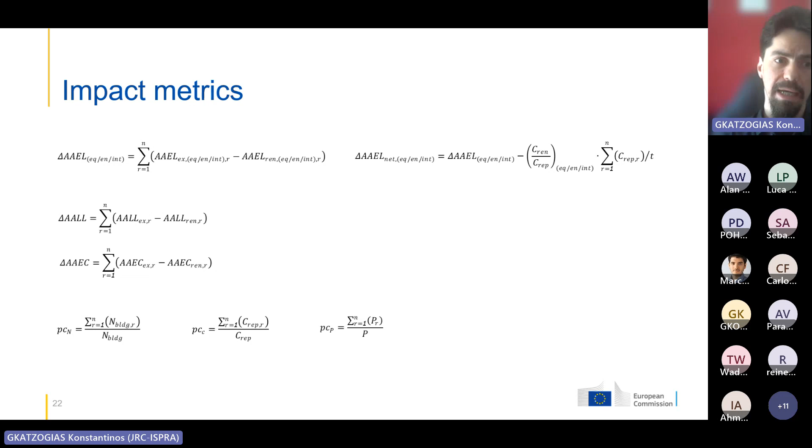Here you can see some additional impact metrics that we have used in our analysis. This consists of economic benefit in absolute form and net economic benefit as described earlier. We have also calculated the benefit in terms of reducing fatalities, the benefit in terms of reducing energy consumption, and also the percentage of renovated buildings, the percentage of the value of the building stock that is renovated, and the affected population. The last three practically describe the scalability of the renovation strategy and subsequently its efficiency.

We modeled the renovation effect in a rather simple way because of the scale of our analysis. So what we did here was to map existing building classes to upgraded vulnerability functions. As an example, we mapped buildings with no design consideration to a medium seismic design code level as the effect of renovation. Similarly, CDL and CDM buildings of low and moderate code to high code, and so on.

A similar approach was also followed in the case of energy performance, where we mapped existing buildings to some target thermal transmittance values for envelopes, including walls and roofs. These target values were obtained from the Concerted Action Energy Performance of Buildings Directive.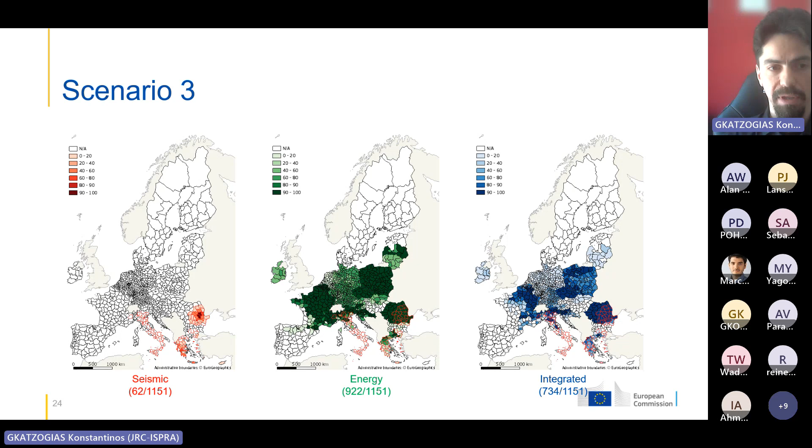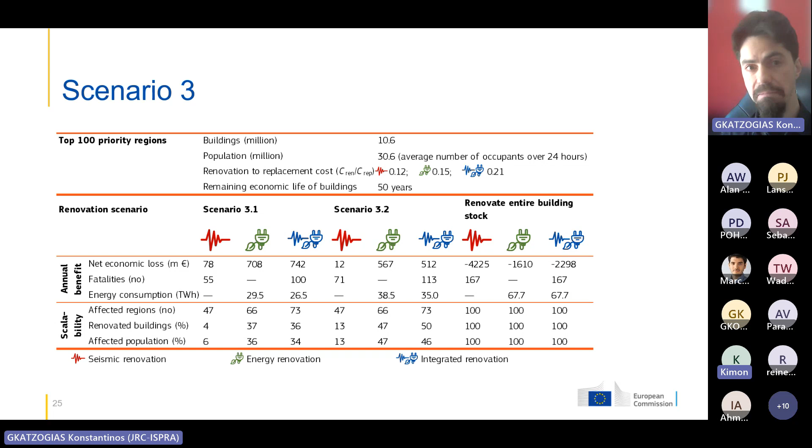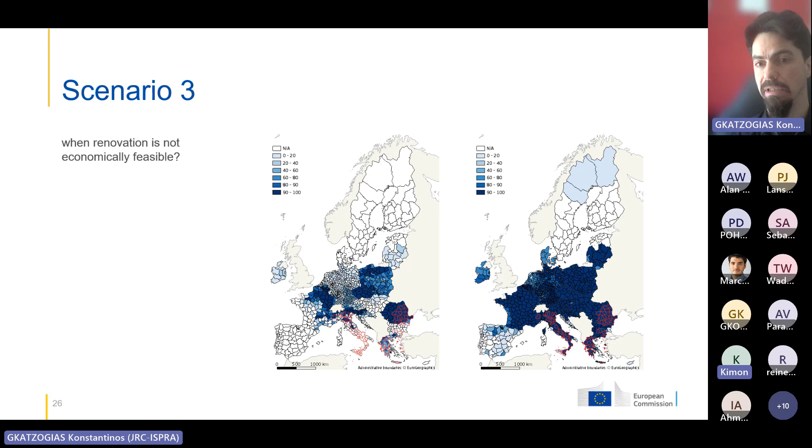On the right, you see the same under a hypothetical renovation scheme where 50% of the renovation cost is funded by a central funding entity within a renovation program. You see that we increase a lot the regions where we can apply integrated renovation, and we also increase by far the percentages of buildings that can be renovated, in all the priority regions.

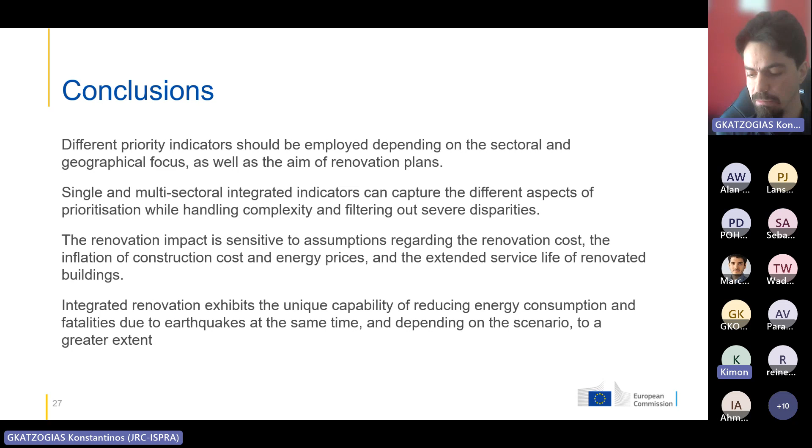I have some conclusions here that I will not go through because I feel like I'm running a bit out of time. We have discussed more or less all of them. More details, more data, more prioritization schemes and renovation scenarios can be found in our recently released technical and science for policy reports.

You can download them from our web platform. There you can also find reports that are not relevant to what I have presented to you today, but are relevant to other activities and actions of the pilot project. Some acknowledgement regarding the pilot project: it was financed by the European Union, and led by our project leader, Silvia Dimova.